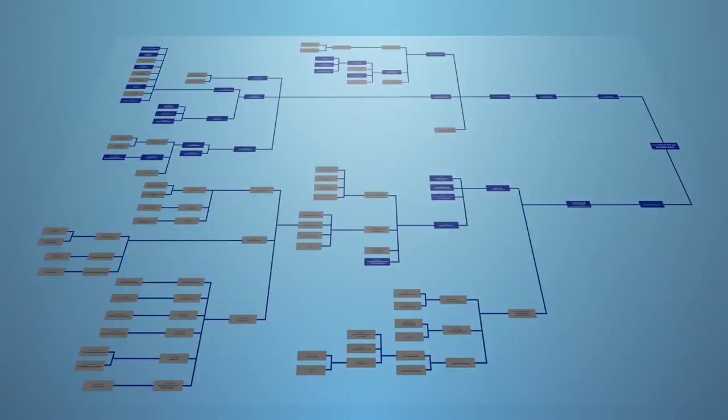Initial observations revealed that the rotor had separated from the cabin. In response, we began by listing all the possible scenarios that could have led to such an outcome, even the most improbable ones. One by one, every branch on the fault tree analysis was put to the test in order to confirm or rule out each hypothesis. We drew on all the information gathered by the investigators on site to piece together exactly what happened. Each and every detail was taken into consideration.

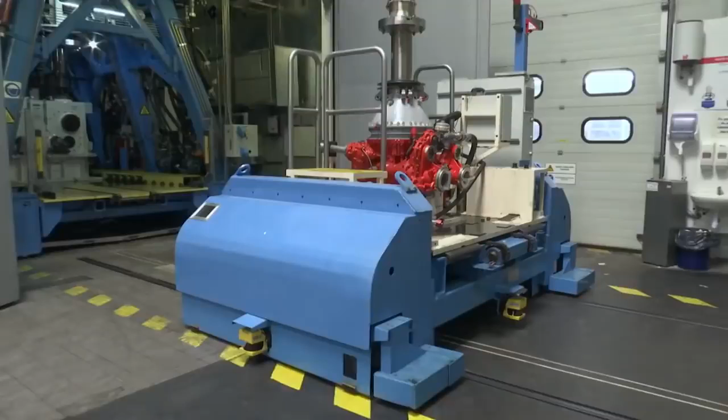We also used complex numerical models in simulating different failure modes, comparing them with observations of the actual parts. In the meantime, we considered and examined a 2009 Super Puma accident that bore similarities. Finally, we carried out about 2,000 hours of testing in dozens of different tests, the aim being to reproduce the failure scenarios envisioned and to identify which one actually occurred. In total, more than 370 people were called upon during the course of a year.

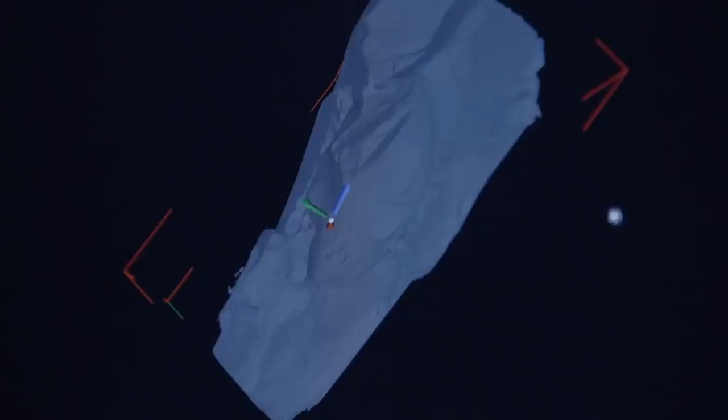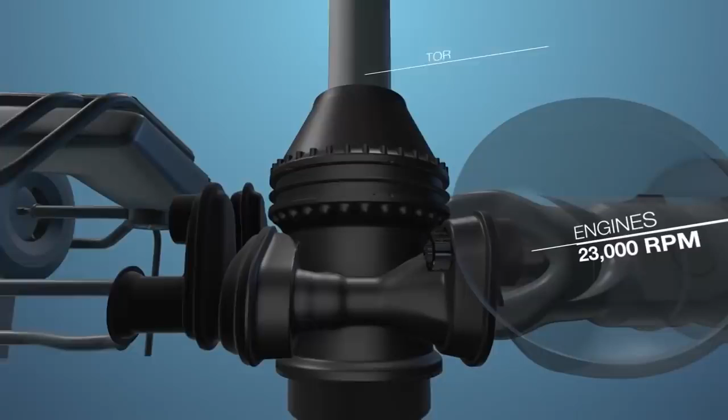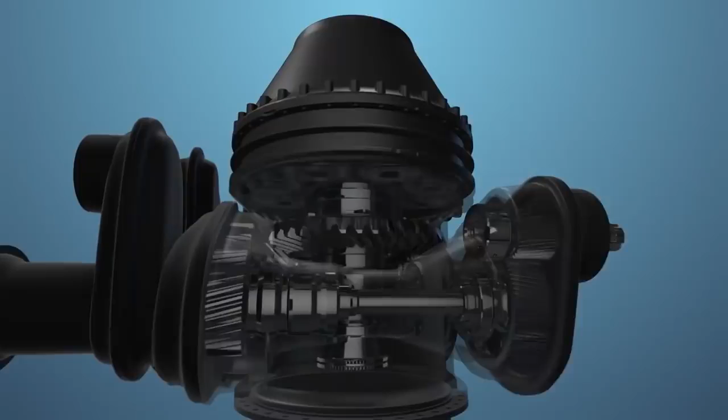Throughout the official investigation led by the Norwegian Accident Investigation Board and supported by Airbus Helicopters, we were able to identify precisely the sequence of events. The origin was traced back to the inside of the main gearbox, a key mechanism in the aircraft, as it transmits power from the engines to the rotors, while reducing rotational speed from 23,000 RPM to 265 RPM for the main rotor. The inside is a series of reduction stages comprising gears manufactured using the finest material and surface treatment technologies and in line with the highest quality standards.

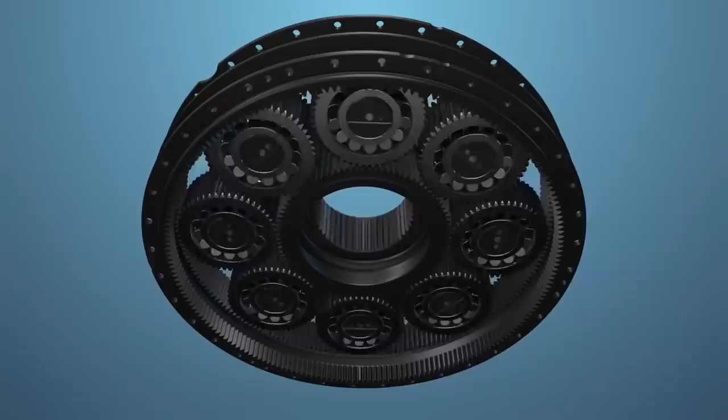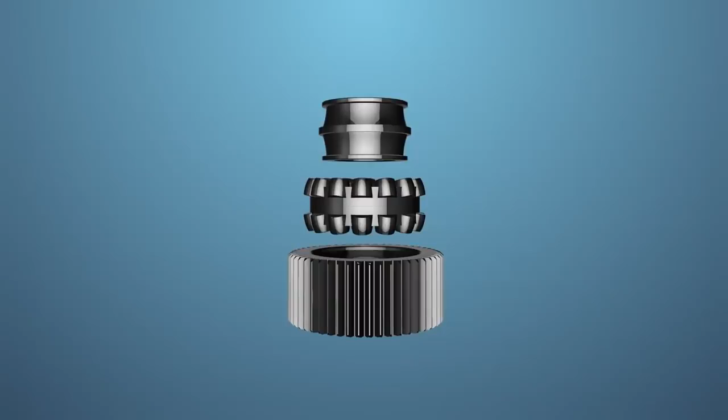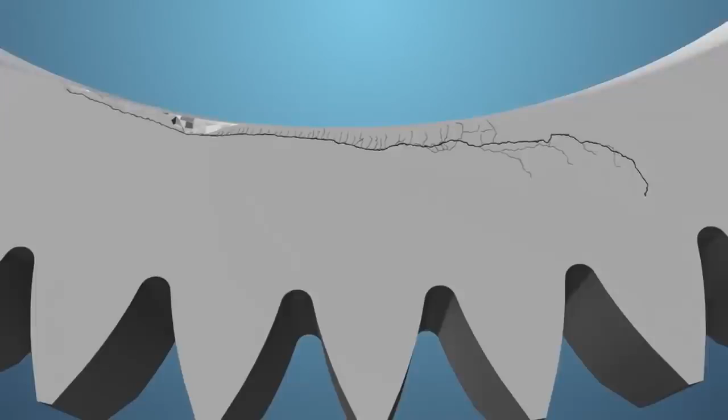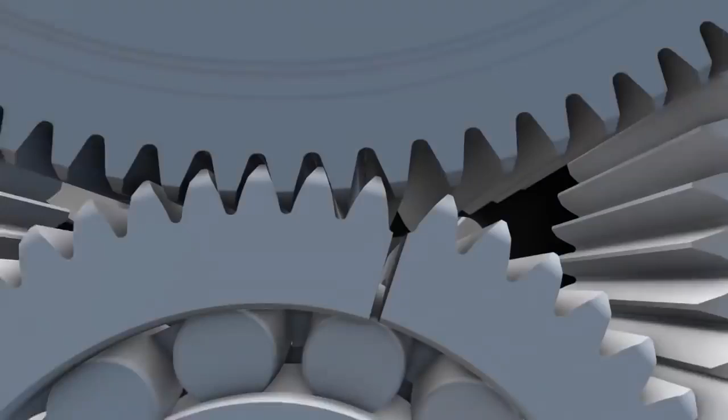The second stage epicyclic gear train comprises a sun gear, 8 planet gears, a planet carrier, and a fixed ring. Each planet gear contains 1 inner race, 2 rows of rollers, 1 outer ring. It is inside this ring that the failure began, with an initial and very limited spalling. Unexpectedly, this very limited spalling gave way to a crack, which then spread until the planet gear split in two between 2 teeth. The space between these 2 teeth grew, causing a collision with a tooth on the sun gear. The planet gear broke instantly.

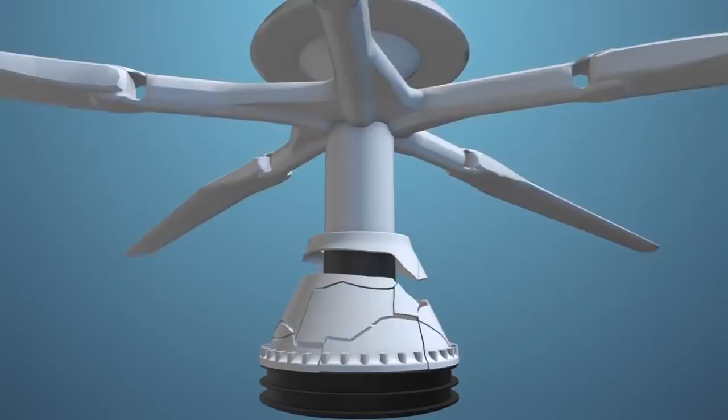Pulled by its own inertia, the main rotor caused the top section of the main gearbox to shear off and separate from the structure. Let's go back to the beginning, however. How could such an accident have happened? The potential contributing factors were identified, and safety barriers were put in place to eliminate their reoccurrence. One of them is the non-detection of very limited spalling.

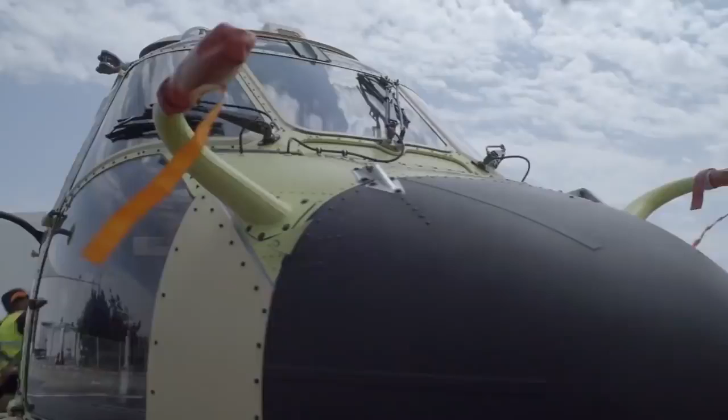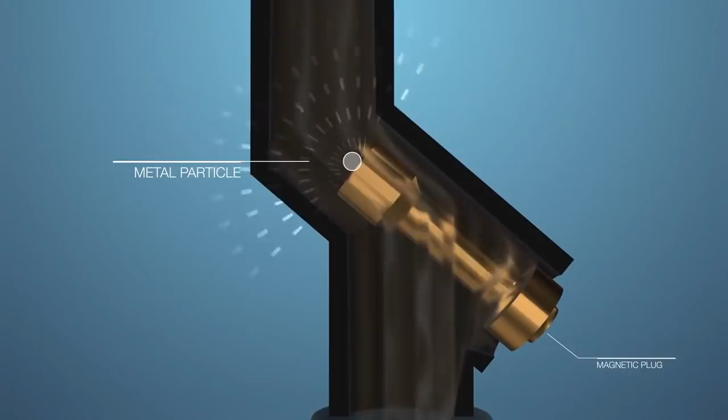Spalling is a normal degradation of bearings that remains acceptable up to a certain amount. This is monitored with magnetic plugs that collect the metallic particles. In the case of LNOJF, the defined practice of particle detection was not sufficient to reveal very limited spalling. We have therefore improved this practice of metal particle detection. The frequency of inspections has been significantly increased. Stricter removal criteria have been put in place regarding particle sizes. Detection methods were completely overhauled and now include a latest generation magnetic plug with increased performance.

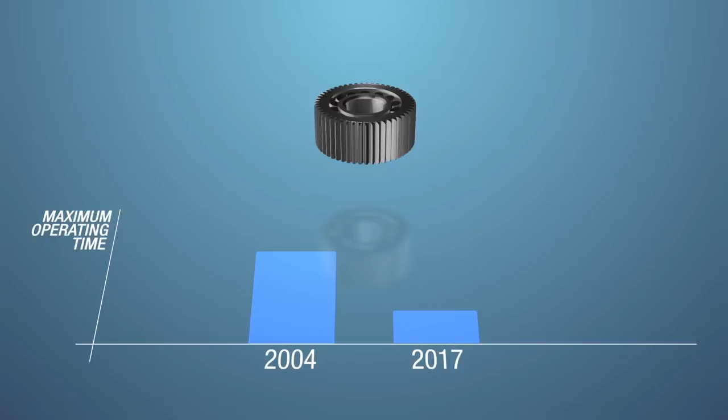Another potential contributing factor is the phenomenon of fatigue. Some metal parts subjected to high repeated stress have a defined number of cycles before their possible failure. Airbus Helicopters therefore defines a maximum operating time for each part. In 2004, Airbus Helicopters defined a maximum operating time in accordance with the certification requirements. In 2017, based on the learnings from the accident investigation, this maximum operating time has been reduced by a factor of 4.

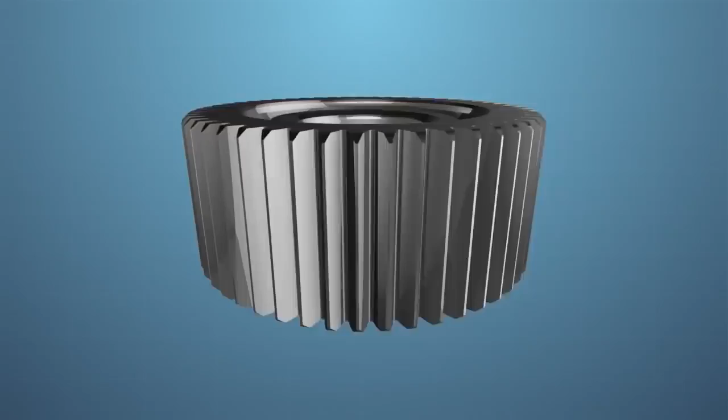Another potential contributing factor is linked to the design of the planet gear. 2 suppliers manufacture these planet gears, and their designs are not 100% identical, even if both match the technical specifications. The second creates greater contact pressure and was used in the LNOJF's main gearbox.

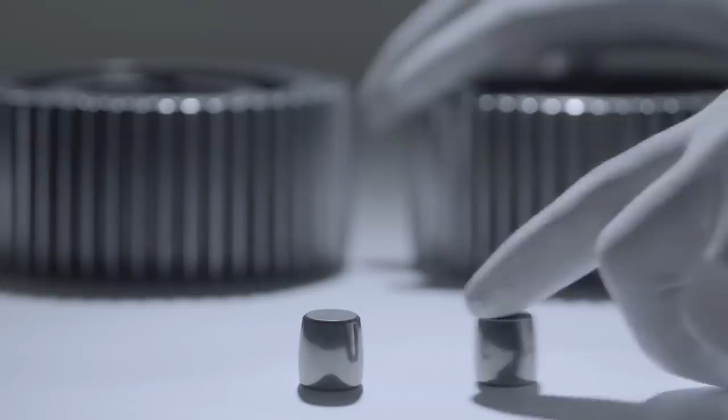This planet gear has now been prohibited outright. The only planet gear now present in our Super Puma family has registered 22 million flight hours without any outer race spalling having been detected in normal conditions.

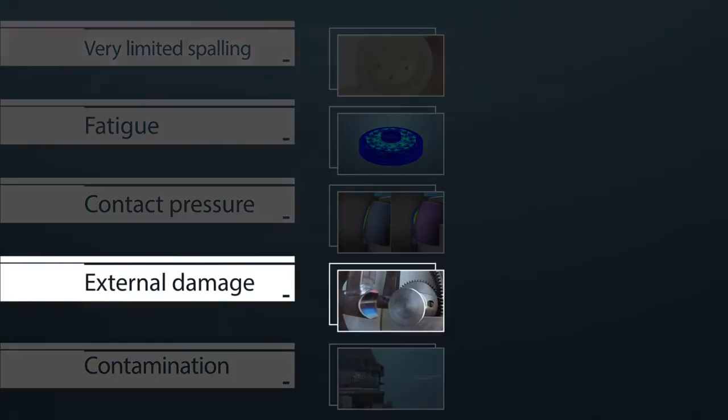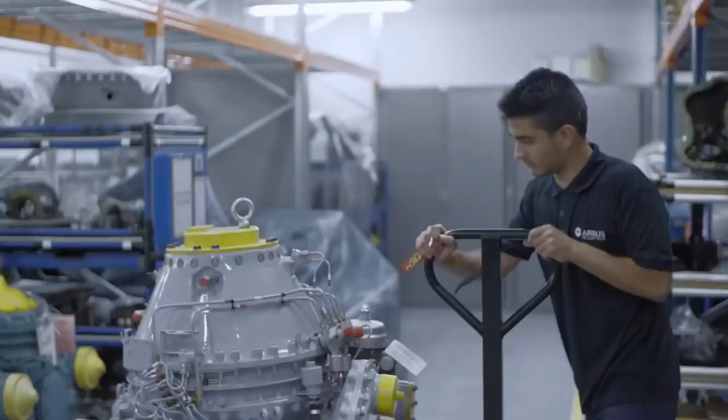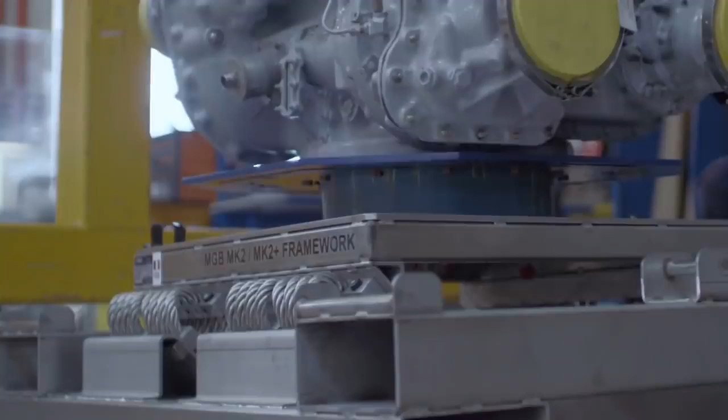Another potential contributing factor is external damage occurring to the main gearbox. Before being fitted onto the helicopter, the main gearbox in question sustained a fall during a road transportation accident. It has been decided to withdraw from service any main gearbox having suffered a shock, a lightning strike, a hard landing. In addition, we put in place a series of initiatives to improve the shock resistance of the main gearbox during transportation and to better report back any unexpected event.

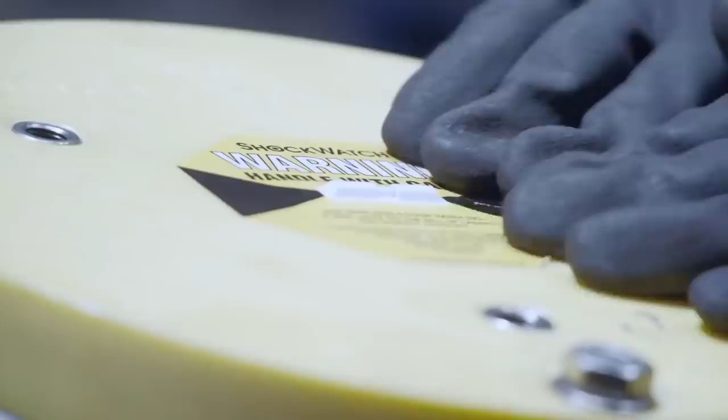Sensors that capture parameters such as temperature, pressure, altitude, lighting, inclination, and shock level have been placed on the main gearbox, and previous history of the part can be closely monitored. The packaging for the main gearbox now includes highly visible stickers that change color if the crate sustains a certain level of force or shock.

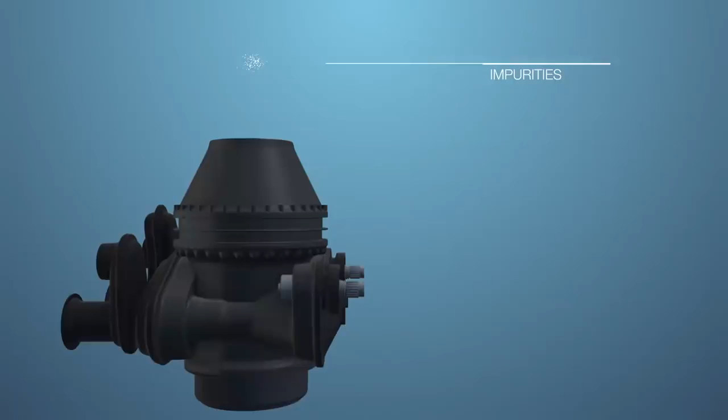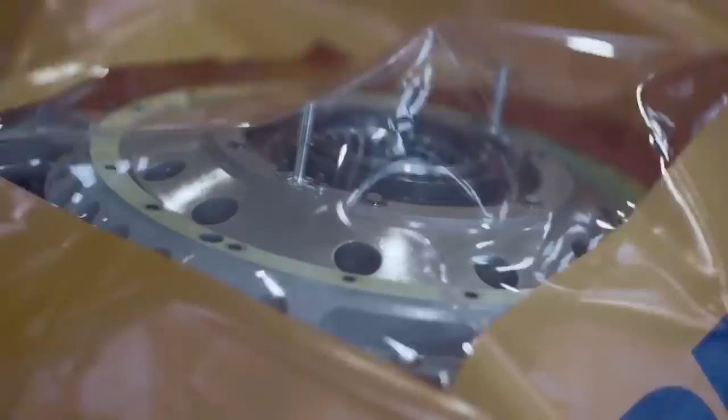The last potential contributing factor is a contamination by impurities finding their way into the main gearbox during maintenance, which then could have created damage in the planet gear leading to spalling. Additional measures have been put in place to protect the main gearbox during maintenance operations, and disassembly of main gearbox modules can now only be performed by an Airbus Helicopters certified maintenance or repair centre.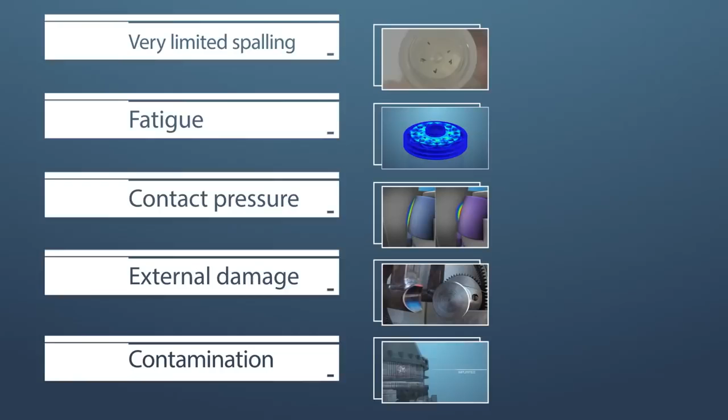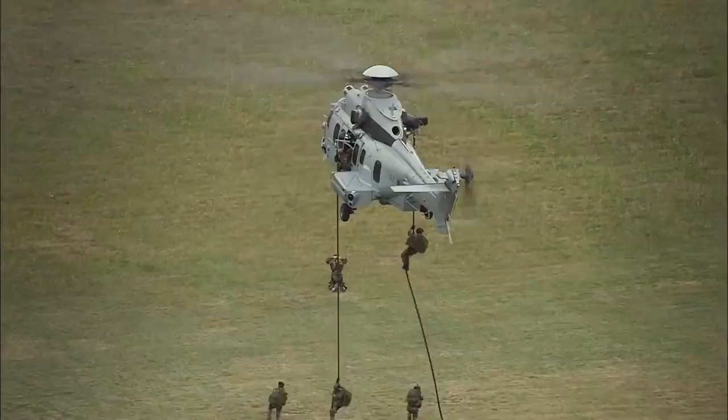The safety barriers put in place are aimed at eliminating the contributing factors to the LN-OJF accident. Based on these measures, the European Aviation Safety Agency and all aviation authorities worldwide have approved the return to service of the H225 and the AS332 L2.

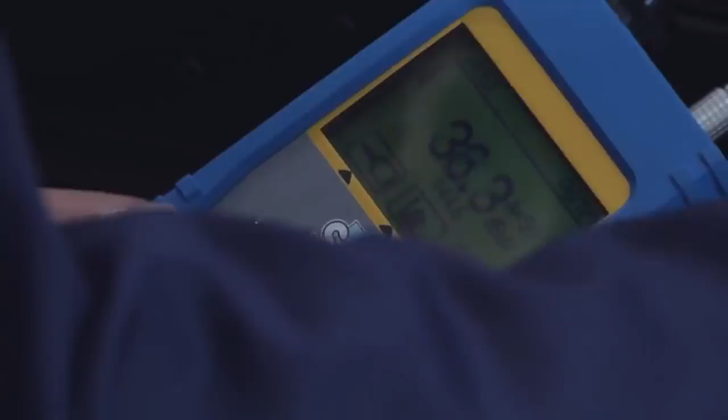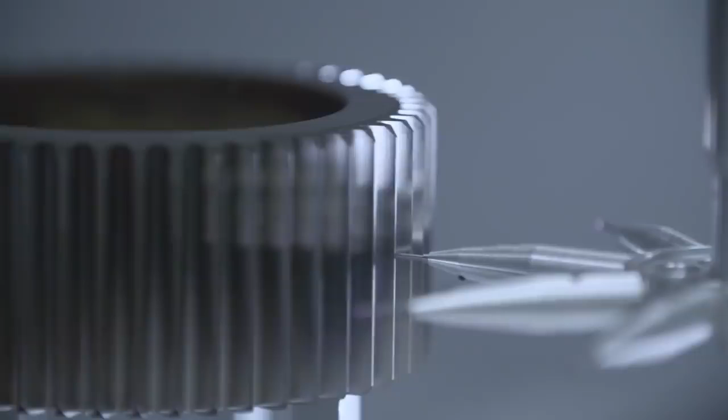Any accident is one too many, and in order to reach our zero accident goal, we are committed to continually improving. The investigation underway led us to thoroughly review and rethink many of our quality and safety processes, not only for the Super Puma, but for all helicopters in the Airbus range. One example is how we are working on improvements for handling and tracking dynamic components. This includes developing better solutions for documentation, repair feedback, and digital solutions for better traceability.

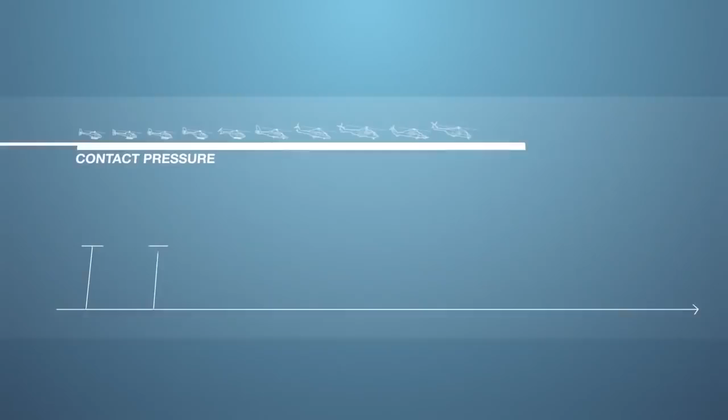Furthermore, taking what we have learned from these investigations, we have gone back and checked the stress analysis for all our aircraft. We took additional steps and applied the same strict standards on planet gear bearing contact pressure to our other helicopters, which led to the removal of 2 types of planet gear as a precautionary measure for the Dauphin family. Finally, we have launched a research program to innovate how we analyze vibrations.

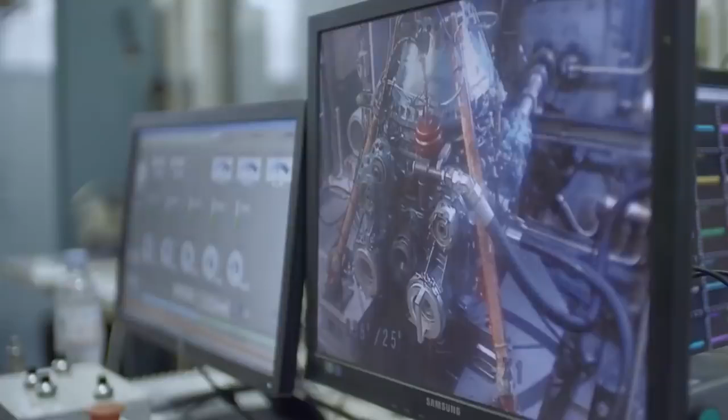The vibration detection systems on the H225 are used to collect and analyze critical data to optimize the helicopter's availability and safety. We are working in partnership with leading university research centers on the detection of occurrences such as spalling and cracks. We already use vibration as a way to detect damage in fixed gears, but applying these methods to moving gears, such as epicyclic gear trains, does not exist. It requires the use of new sensing technologies and complex signal processing methods. We are seeing some promising developments in this field.

All this leads to improve our safety culture. To you who fly in our helicopters every day to complete your missions, and to you, our employees who test each helicopter before it's delivered, your lives are invaluable. We are doing every day everything in our power to learn from this experience and to ensure that the Super Puma is flying with an increased level of safety. Just as we rely on your continued faith, you can rely on our unbending commitment to safety.